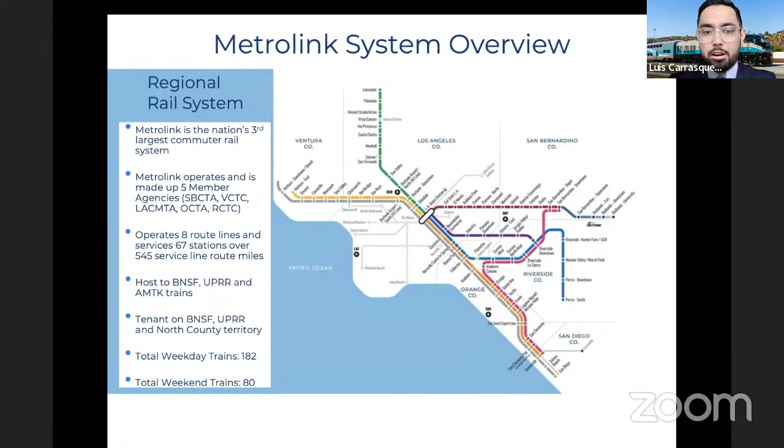So to start off, I wanted to provide a quick Metrolink system overview. Metrolink is the nation's third largest commuter rail. We are made up of 5 member agencies across 5 different counties. We operate 8 different route lines and service 67 stations, over 545 service line route miles. On our territories, we not only have Metrolink trains operating, but we have freight trains. That includes BNSF, Union Pacific, as well as Amtrak trains, and our trains operate on other railroads. So we operate on BNSF, Union Pacific, and North County down towards San Diego. We run about 182 trains weekdays and 80 on the weekend. Next slide, please.

So I'm going to start narrowing down specific to Baldwin Park. The only tracks on which Baldwin Park runs on the Metrolink system are on the San Gabriel Subdivision. That is composed of the San Gabriel line and the Arrow service, which we just opened last October. The San Gabriel Subdivision has about 65.5 route miles, 87.5 track miles. So that means that 66.5% of that entire subdivision is single track. We have 119 crossings.

So I just wanted to take a moment regarding single track. Ideally we would like to have multiple tracks. Most of our territories have 2 main tracks, the most we have in our territory. That allows us to run service bi-directionally. We are also able to run trains in the event that there is an incident on one track, to have throughput, although a little reduced, but it does give us that flexibility. Now, there's a lot of constraints regarding building additional tracks. You need to have the real estate, the funding, but as of right now, it's 66.5% single track on the San Gabriel Subdivision. And specific to the Baldwin Park area, it is single track.

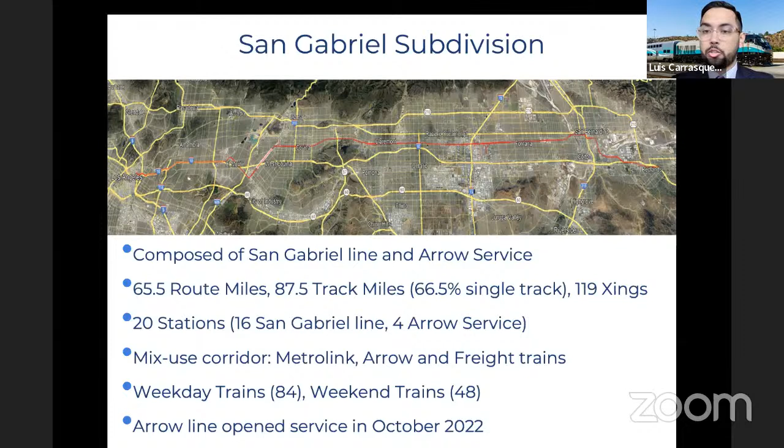The entire subdivision has 20 stations, 16 on the historical San Gabriel line and 4 for the new Arrow service that we just opened. It is a mixed corridor, as I was mentioning. So here we run Metrolink trains, the Arrow trains, and freight trains. During the weekday, we run about 84 trains, and during the weekend, 48 trains. And as I just mentioned, the Arrow line, which is the 10-mile extension between San Bernardino and Redlands, we opened in October of 2022, and we run diesel multiple unit trains as well as legacy trains.

So narrowing down a little bit further into Baldwin Park, it's about 2.5 miles of track in the city of Baldwin Park, all single track. We have one station, Baldwin Park. There's a total of 9 crossings. And I try to visually represent it here on the map as a layout.

So on the top right of the picture, that's where we have the Baldwin Park station, and we have Ramona and Pacific Avenue. And just to give a little context, given the short distance between these crossings, they are all connected, or in other words, they're DAXed.

And what that means is when one crossing activates due to trains on the approach, then the downstream crossings activate as well. The reason for that is we have federally required warning times and preemption times that we have to meet. And it would not be possible for each one to be done independently. So we just leverage one, which is mainly Pacific and Ramona on either side of the station, to then tumble down the downstream crossings.

And if you can go back real quick, I just wanted to touch on, I know that on the week of June 21st, there were some reports of gates down over a long period of time. I just wanted to touch a little bit about that, is that we've had a couple intermittent failures specific to Pacific, where we've replaced the module on the 20-year-old equipment.

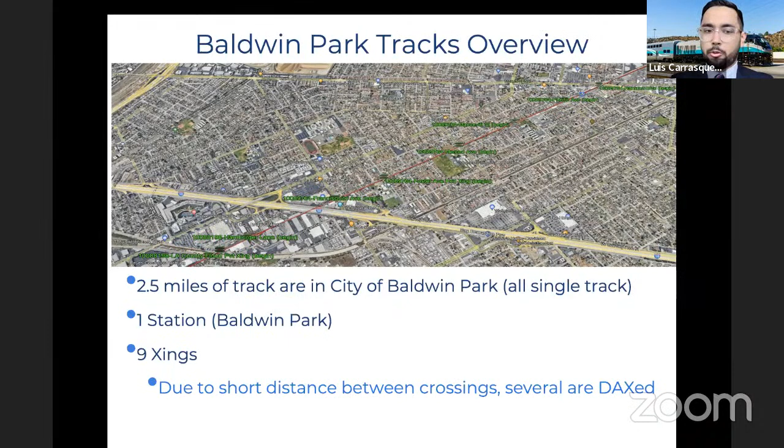Next slide, please. So now I'll get into the portion of the presentation on this new technology. And in order for me to get into that, we are leveraging a system that Metrolink has installed on our trains, and that is the Positive Train Control System, or PTC. And in a nutshell, this graph displays what PTC is. So it's a safety overlay system that is installed on our trains, and it's in constant communication with various systems out there for its purpose.

So it is constantly getting GPS signals, so the PTC train knows exactly where it's at as it's moving along the tracks. It is in constant communication with the signals and switches, so the PTC system knows what signal is ahead, if it's a proceed, a stop, or a reduced speed. It knows it ahead of time, and it also knows the switch alignment ahead of the train.

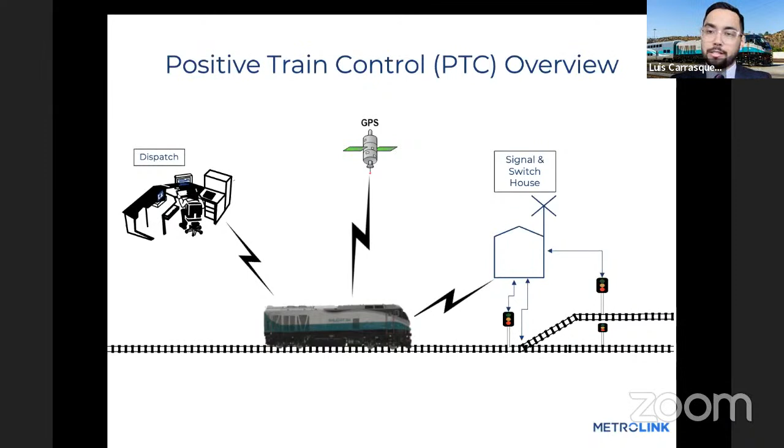And lastly, but importantly, it's also in communication with the dispatching center in Pomona, so that if there is a need to issue a temporary speed restriction or a track out of service or a work zone, that gets sent electronically to the train, and then the PTC system is able to protect and enforce for it.

Next slide, please. So building upon that, PTC is designed to perform the following core tasks per regulatory requirements: prevent train-to-train collisions, overspeed derailments, incursions into established work zones without authority, and movement of trains through switches in the improper positions.

But most importantly, it needs to provide warning to the train engineer for all of these targets, switches, signals, speed restrictions. And if the engineer does not take action in a timely manner, then the PTC system automatically applies the brakes and stops the train before it gets into that unsafe scenario. This was a direct response to the Chatsworth accident that occurred in 2008.

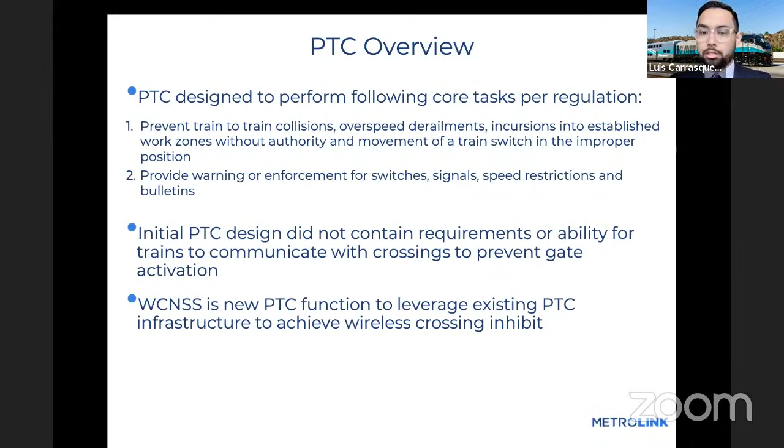The initial PTC design did not contain any requirements or abilities for trains to communicate with crossings, to inhibit gate activation or wirelessly activate crossings. But now that we've been able to implement PTC, we're now leveraging that base infrastructure to achieve operational efficiencies such as wireless crossing, which is what I'll present on next. Next slide, please.

A good example would be an express train. An express train doesn't stop at every single station. And since it's able to know which stations it's making a station stop, it will then also be able to inhibit or keep the gates up for those crossings that are downstream of the station.

The train communicates with that crossing. And then once that wireless communication is established between the train and the crossing, then the crossing gates will remain up as the train is approaching and making the station stop.

So we're leveraging that functionality of PTC of being able to warn the engineer once the gates are up, hey, you have a station stop that is required. And in the event that the engineer is distracted, incapacitated, or doesn't slow down fast enough, then the PTC system will apply the brakes and enforce the train to come to a stop since the crossing gates are up.

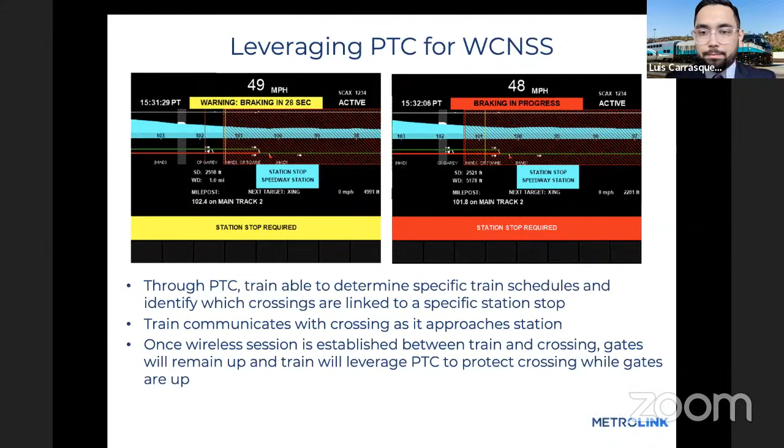Next slide, please. So in the next few, I'll present the conventional activation of crossings. So in this one, the train is approaching the station. You'll see that the downstream crossing activates, and I'll touch a little bit on that. Once the train is stopped for a while, then the gates will recover, and then ultimately, when the train proceeds, then it activates again. So why does this happen?

So the conventional crossing system that's been in America for decades and decades is that the crossing activates based on the approach, but the crossing does not know if the train is making a station stop or a through move. It needs to default to the most conservative and safest approach, which is making a through move.

So once you add in warning times that the trains need to meet the gates coming down and the preemption, then that's when you get the unnecessary double activation of trains coming to a station stop, crossings activate. If the train dwells long enough, then they'll recover. And then once the train leaves again, they'll activate. So I know different communities call it like the ghost train symptom, but this is what's currently happening now.

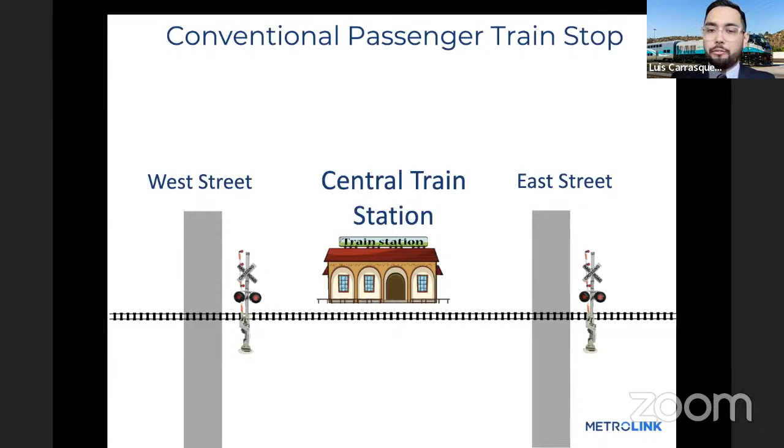So if we go to the next slide, I'll present how it will be alleviated with wireless crossing. So you'll see that as the train approaches, the gates on East Street are going to remain up. Train completes the station stop. Once the train is ready to depart, then at that point, East Street gates will activate. So you get a 1-for-1 activation when the train is actually proceeding through the station.

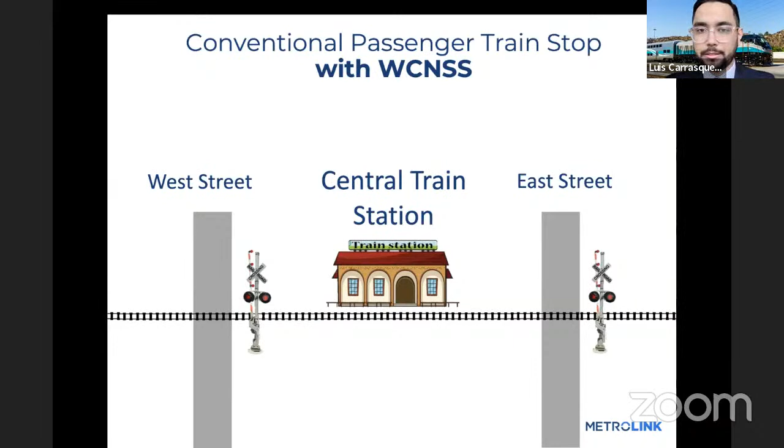Next slide, please. So just to summarize the benefits of wireless crossing, it reduces the amount of gate downtime at designated crossings due to passenger station stops. It minimizes the impacts to vehicular and pedestrian traffic to reduce delays and confusion at these crossings near stations.

It extends the life of the crossing equipment since we're basically now activating the gates half as often as they're currently doing now. And it also allows the train to depart the station without the need to creep or to start and stop once they're departing the station to wait for the gates to fully come down and then proceed through the station. Next slide, please.

So this has been a project long time coming. I'll get into how this started on the Arrow project, but now that that's been successfully deployed, now we are looking to deploy this elsewhere across our system. So what do we need to do to get this at the various crossings that we have identified?

So there's a variety of hardware that needs to be installed at the crossing, and also needs to be modified to include the new technology. We need to do application logic predictor changes. We need to procure licenses per each crossing location. We need to change our internal systems, and ultimately and lastly, test with test trains to make sure that the crossings are indeed staying up as the trains are approaching the station. Next slide, please.

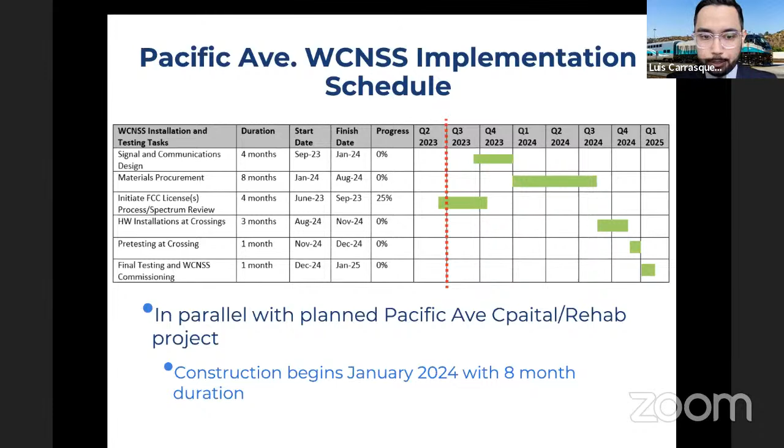Next slide, please. Okay, so that concludes my presentation on wireless crossing, and I'll touch a little bit on some of our zero emission efforts. Next slide, please.

So we've been looking at various technologies and solutions that are currently available in the market. So we have battery electric locomotives, there's hydrogen fuel cell locomotives, but then there's also multiple units, like the diesel multiple units that we have in the Arrow. That one is diesel, but there are options for those to be battery electric as well as hydrogen fuel cell. So there's been a lot of effort investigating and running models through various of these solutions, and we'll touch on these on the next slide, please.

So as far as our current locomotive, we run a push-pull operation hauled by locomotives. Our car length varies based on the territory and the service level, but our typical Metrolink train set is between 4 to 6 car sets. So that's the locomotive, and on top of that, the 4 to 6 cars. That's around 253 seating capacity.

So we ran models to have a zero emission locomotive, but our models showed that we're not going to be able to support the service in regards to the infrastructure or the need for the energy with the 4 to 6 car set. So we narrowed down our model to only be 2 cars per set. And then if you click on the next one, yeah.

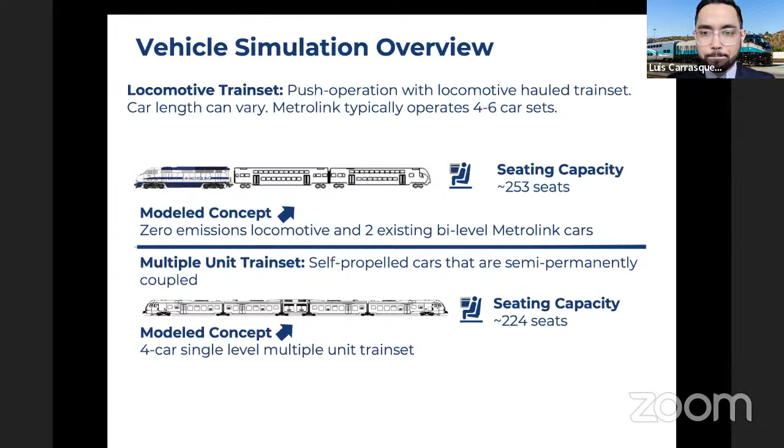And on top of that, we're also constrained by our territory. You know, we understand the need that we have. If we do procure this equipment, it needs to be able to work across our various systems. Our train consists are not captive to a specific line or piece of track. They kind of rotate throughout the day based on the service needs, so we can maximize the use of our equipment.

So we did another model for the most extreme scenario, which would be going from LA to Lancaster. There are steep hills. I think the highest grade is up to 5% there. It's 76 miles, a lot of curves. So it is the worst case scenario, I guess you could say, for us to run our simulations. Click on the next point. So if we have a battery locomotive with 2 cars, we identified that on a single charge we would only be able to do 1 round trip.

With a battery, zero emission, 4-car, 1 trip. And then hydrogen, it gets us 1.5 round trips. I think there might be 1 more. Yeah. And then the multiple unit hydrogen, it gets us 1 round trip. So these are some of the constraints that we currently have.

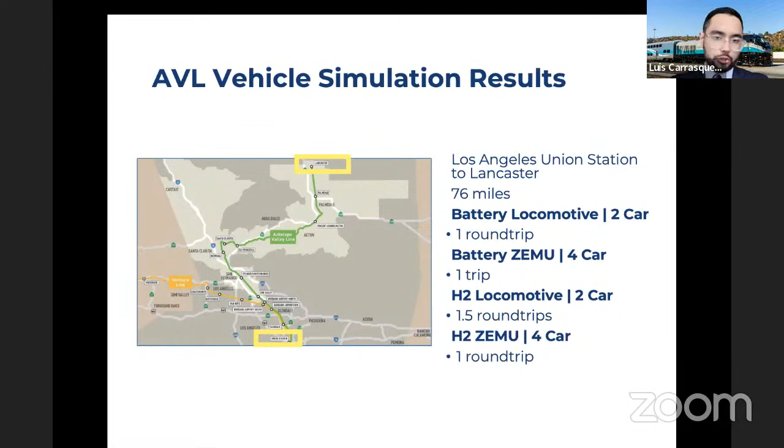Right now we're able to operate the train throughout the day without the need to refuel, but this just kind of shows us that the technology will require additional infrastructure, charging along the way at end stations, in between trips, which adds on to the turn time. So there's a lot to be said rather than just getting the equipment. That is part of the analysis that we've been doing.

Next slide, please. So in summary, some of the challenges: zero emission technology is still in its early stages of deployment in rail. Useful life of rolling stock is long, 25 to 30 plus years, leaves few opportunities for emission upgrades. Once we make that investment, we want to make sure that we make the right investment, not for the near future, but that's going to last us for the duration of the equipment life. CARB's In-Use Locomotive regulation will only allow purchase of zero emission equipment starting in 2030. So that is right around the corner.

So we're kind of faced with the need to only procure zero emission, yet the technology is still in its early stages of development. So we're kind of dealing with that. Zero emissions transition will be costly, and it's currently unfunded. Tier 4 diesel locomotives cost around $10 million today. A prototype battery or hydrogen may cost 3 to 5 times as much, and that doesn't even include the infrastructure updates that I was just covering.

New and robust grant opportunities will be needed to support equipment turnover. Our team has been diligently looking for those and working to obtain those, but it's going to be crucial to that expansion of our fleet in the zero emission world.

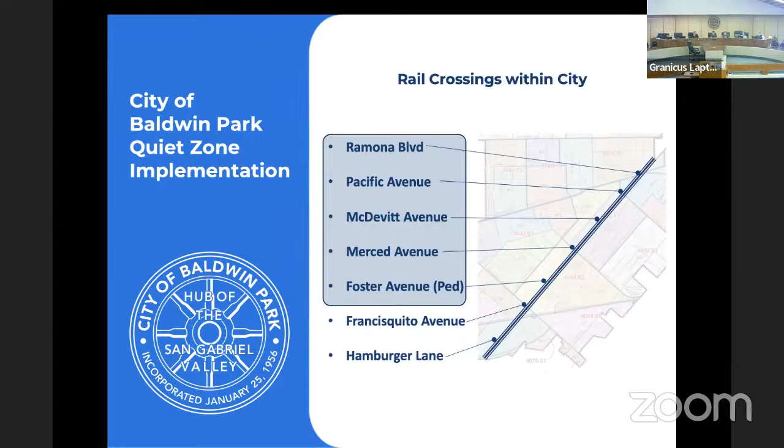Next slide, please. So Ramona Boulevard was completed in 2017. When Metrolink came in to make those improvements, they brought in quiet zone ready safety improvements. And so that's been completed. And as Luis mentioned, this is the first crossing that is a candidate for the wireless technology.

Pacific Avenue, however, has been quite challenging to design and implement. And so today I'm happy to report that the construction and maintenance agreement with Metrolink has already been secured, and we're getting ready to list this project for construction. We plan on doing that this fall and going into construction first thing January 2024 and completed within 8 months.

So this has been a partnership with Metrolink, who helped us out with our design efforts and did the rail signal design, and they will be implementing the construction portion of the train rail side, and the city will be doing Pacific and Bogart and the city side improvements.

And so as far as McDevitt, Merced, and Foster, which are the 3 downstream crossings after Pacific, those are currently under design. We were able to partner with, again, SCRRA Metrolink with a DSA, a design services agreement, for the design of those crossings. We expect them to be completed by the end of 2024 and then go into construction in 2025. So as it stands now, it's our estimate that by the end of 2025, we would be ready to apply for the quiet zone designation.

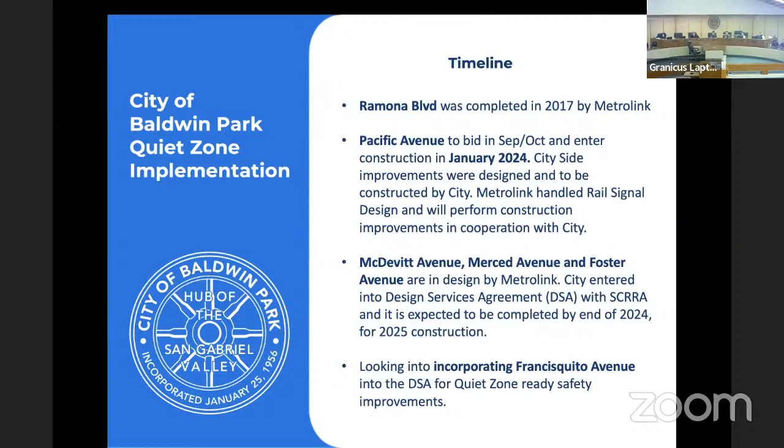And just wanted to add one last point: we're also looking into incorporating Francisquito Avenue. So we're going to be approaching Metrolink to see if we can have a design of the improvements at Francisquito to include in the quiet zone and then extend that into the commercial area if possible. So that's something that we're looking into. And that concludes my update. Thank you.

I'm sorry, do you have the design that you have been working on? Absolutely, yes. I can email that to the city council. Great. Are there any other questions from council?

Mayor, I know you established a good relationship with Metrolink, but I want to thank Luis, because when the issues of the crossing arms staying down kept happening, initially Metrolink's response was, in effect, a bit of a patchwork, meaning patching one and then the others that are bundled together by logic having the same problem, because they were replacing only one at a time, not quite knowing that the problem was more wholesale. So 3 weeks ago, and not because I got caught in the waiting, but I did,

Metrolink approached it more from a wholesale point of view and changed the master control right by the station, and that should take care of the problem. In fact, they believe that's the fix. So it's a permanent fix until the wireless technology comes in, which is what you just went over. And it's going to provide a further level of refinement so that the wait time at the crossings will be far more precise.